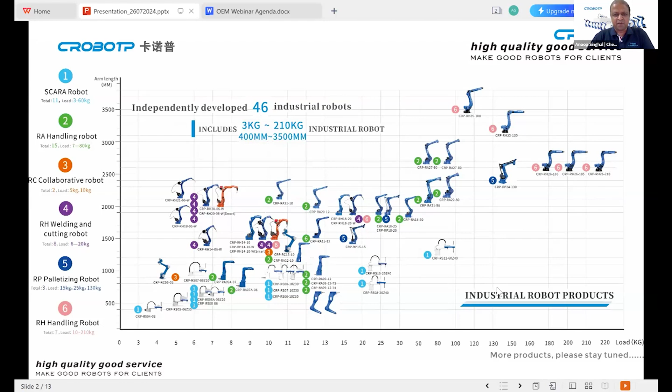We have a big range. In industry, we have requirements for handling, welding, cutting, palletizing, and painting. From CRP, I should say that we cover most of the requirements, and we have around 46 models now. We will be developing 4 or 5 models more this year, and we will have around 51 models by this year end.

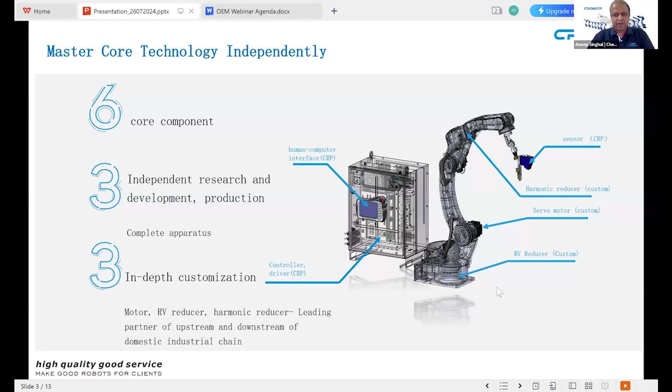If you talk about the technology from CRP or any robot manufacturer, there is a controller, an interface, a manipulator, and accessories. If we take an example of a welding robot, there is a torch, there are sensors, to compensate for the effect of gaps and other things. From CRP, we manufacture the complete components, all 6 core components inside, and we have the complete package available for the industry.

For welding robots, since there is a separate robot category for welding, we have around 6 models. 3 of them are for 1.4 meter, 1.8 meter, and 2.1 meter reach. Then we have the very high speed Nynhan series, with very high speed and very low spatter, ultra low spatter cold metal process, which we call CMP also. So we have those categories also from CRP.

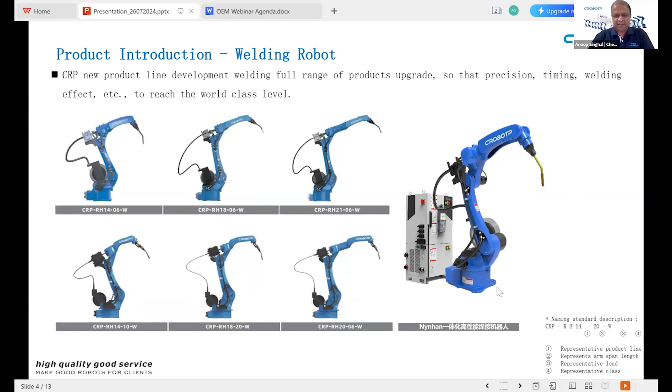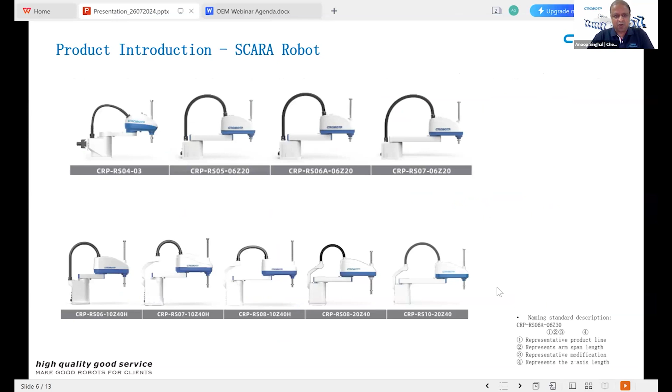For handling robots, we have 6-axis robots from 7 kg payload to 210 kg payload, and 900 mm reach to 2.6 meter reach, to cover the complete category of requirements. For SCARA, this is a 4-axis robot, and we have robots from 3 kg payload to 60 kg payload, and up to 1 meter, 1000 mm, reach.

Then we come to the topic of collaborative robots, which we call cobots also, where the robot can work in cooperation with human beings, and can work without any hazardous activity alongside humans, without any compromise on safety. We have the complete setup of cobots, with 2 models for welding and handling applications.

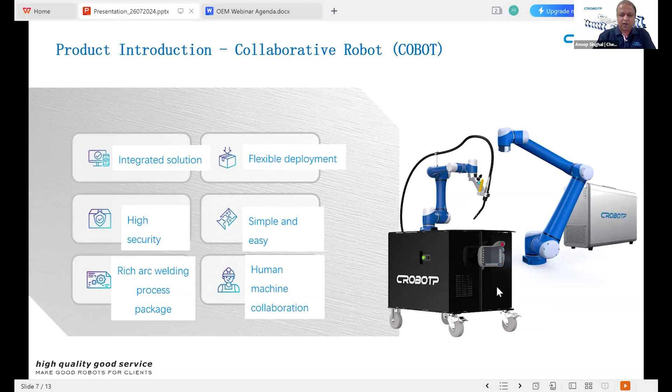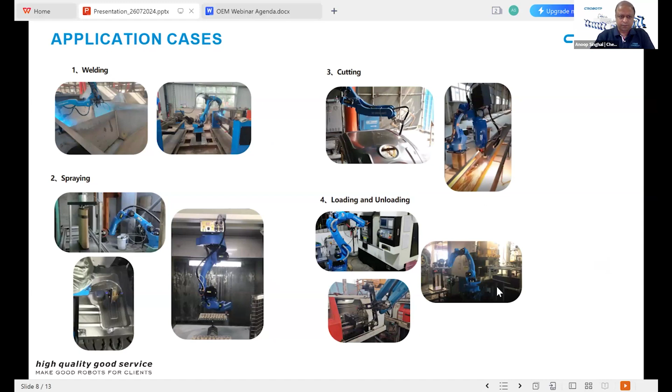Then if we go for the applications or industry requirements where we can install robots or cobots, we can do welding, cutting, spraying, loading and unloading. These are typical application cases where we can deploy robots or cobots. In the field of 3C, we can do placing, polishing; in the automotive industry, welding, cutting, pick and place, machine tending, painting.

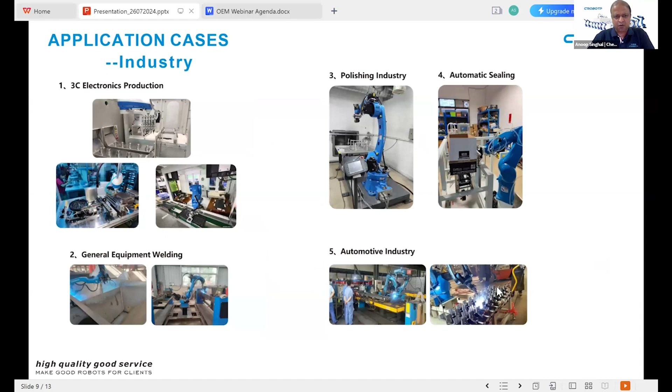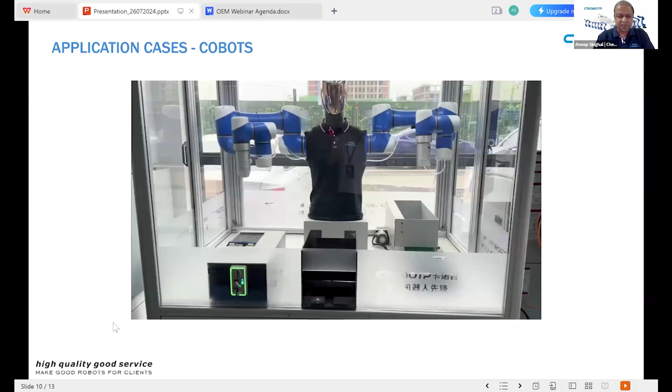These are the different applications where robots and cobots can be deployed, and we have the complete series from CRP. This is a small video to show how two collaborative robots from CRP are working in synchronization with each other. It is a small video, very crisp.

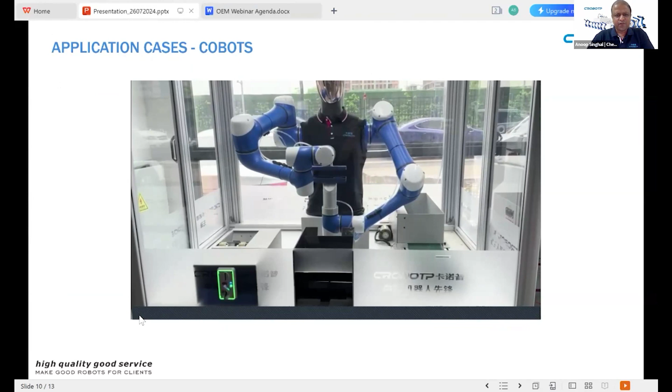So it is a typical example of pick and place kind of activities for robots.

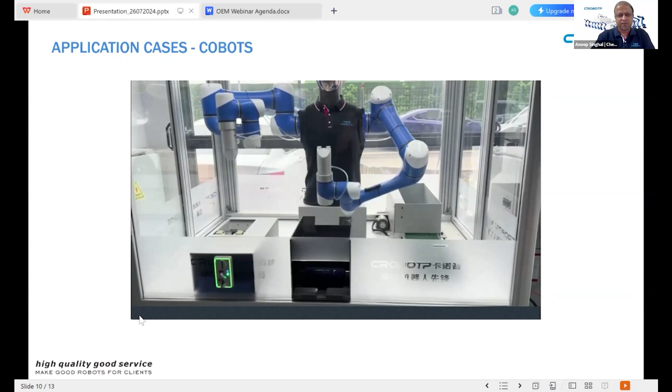Then we go for the welding. Here is another video to show the welding of the cobots.

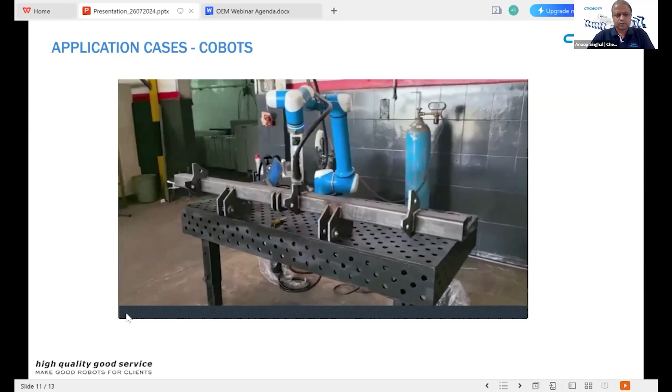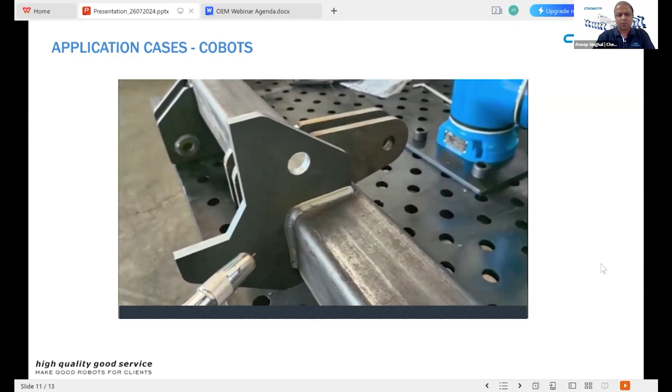So these are typical examples where robots or cobots can be deployed. Another example, which is a very latest field in metal fabrication and cutting industry, is laser cutting through robots. CRP can provide the complete setup for the robot and the complete package.

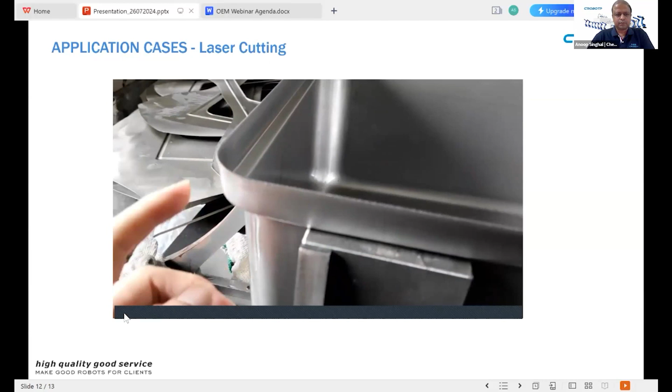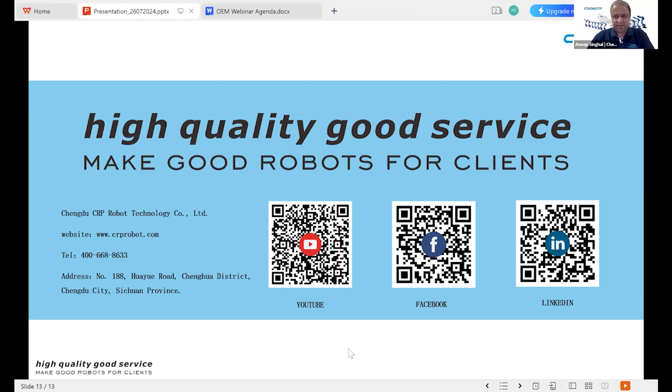So this was all from my side. CRP is available in India now, and we always have a commitment and a promise to our clients and to this industry that we will be making good robots or cobots for our clients. With this, I would like to finish my presentation.